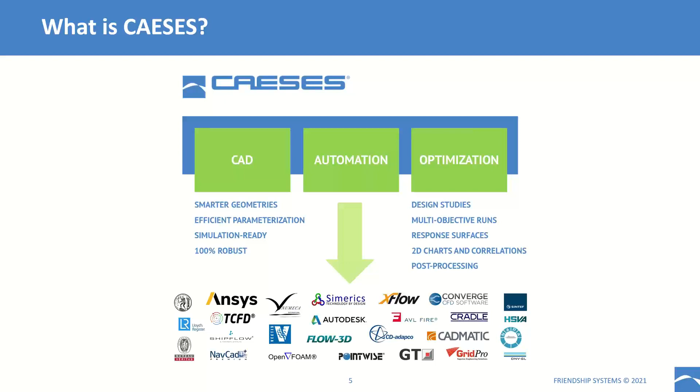So now let's take a look at our new release, CAESES 5. CAESES 5 can be regarded as the beginning of a new generation in terms of the development of CAESES, and it brings along news in terms of technology, what's under the hood of CAESES, but also what is on the outside, meaning the user experience, the things you will readily see when you work with CAESES and open it.

In terms of the things happening under the hood, but also some directly visible things, this release is a new platform into which many years of development went, and upon which future versions of CAESES will build, creating the necessary foundation for many future developments already on our roadmap or that will come onto it. So come along and let's take a look at what's new.

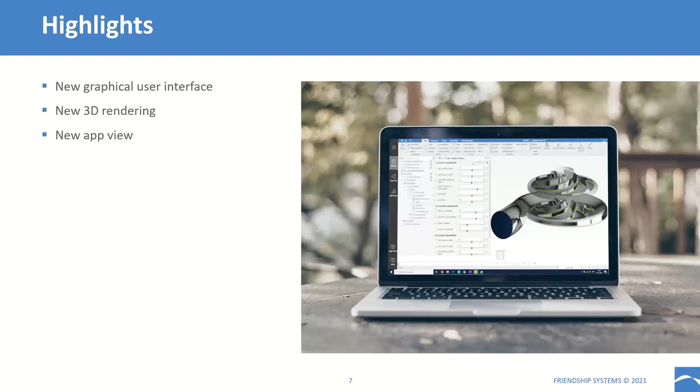The highlights are a new graphical user interface, new 3D rendering of the geometry in the graphics window, a new so-called app view, which we'll learn more about later, some smaller changes that make modeling easier and allow cleaner project structures, a new multi-threaded core inside CAESES, and a new design space dimensionality reduction method, which might need more explanation later. There are new morphing methods for imported geometries, improved documentation to make starting with CAESES and looking things up easier, easier access to support to get in contact with us, and easier license administration.

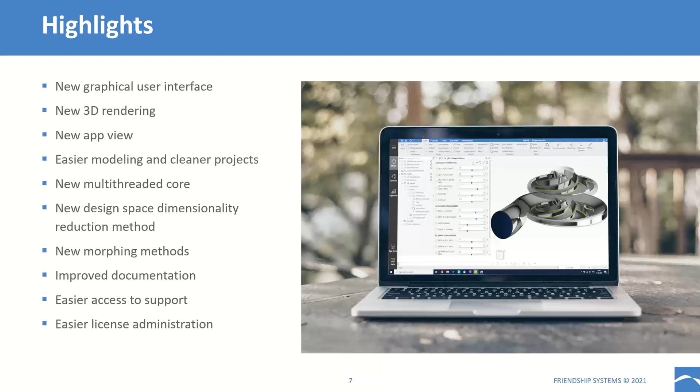So let's start with the first topic, the graphical user interface. This is definitely the first thing you will see when you open the new release. The new user interface is more organized, easier to use, and has a more modern look, which is nice to look at, but I think the two points at the beginning are very important, as they will ease the process for existing CAESES users, but also new CAESES users.

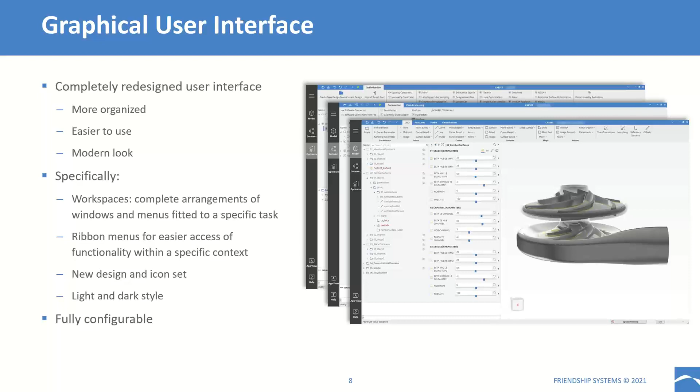This new user interface introduces the concept of workspaces, meaning complete arrangements of windows and menus dedicated to specific tasks, so it's easier to find the functionality you need. It brings along ribbon menus, a familiar element, a new design and icon set, and a light and dark style to match all preferences. If you have preferences beyond what's readily available, it's also fully configurable, so everything can be adjusted based on your requirements.

What you also see in the user interface, in the graphics window, is the new rendering engine. We've introduced a new, more advanced rendering in CAESES 5, allowing a more realistic view of your geometry models with more realistic shadows and transparency. You can set visual material settings on your geometry, like how reflective or shiny it is, and place your model in 3D environments, which wasn't available before.

We can also set local and global settings for things like render accuracy or specific views like section view and isophotes. Performance has increased too, giving much higher rendering speeds, especially for large models and imported geometries with a lot of small patches. Everything is much faster and more fluid. This rendering engine is also a necessary foundation for new developments regarding interactive working in the 3D view, which we'll see later in the new morphing capabilities in CAESES 5.

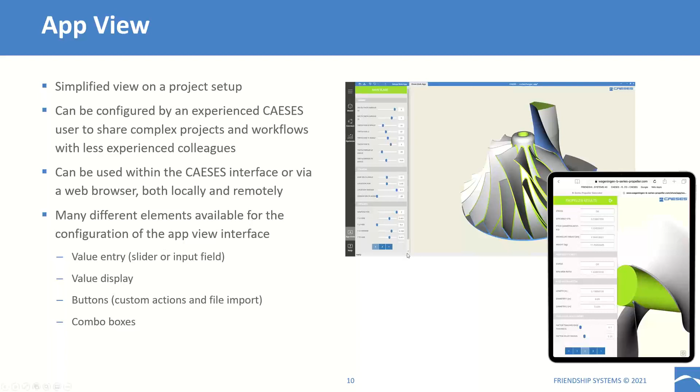The last topic at the surface of CAESES is some improvements for easier modeling and cleaner projects. We've introduced so-called dynamic object types, where you can simply create a curve without directly specifying which type of curve you want, or a point or a surface, and then choose the creation method after generating the object, based on a certain task you want to do with it. You can also change this creation method later in your project without breaking the dependencies.

Another improvement is post-processing operations at the object level, so you can directly modify objects without the need for image or transformation objects. This is something existing CAESES users might be familiar with. This speeds up the workflow, and because you have fewer additional objects, it keeps the project structure slim and clean.

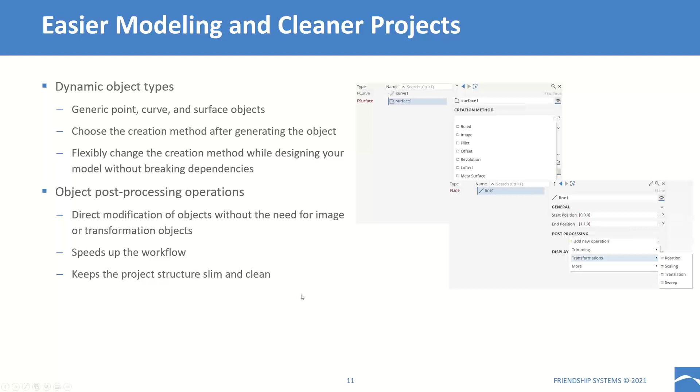And finally, improved object tree search, where you can search for objects and filter your object tree so that it makes it easier to find specific things, or have certain views on your object tree with only certain types of objects that you want to see.

Again, this is what the first things you will see on the surface, a short overview, and now I will give over to my colleague Carsten, who will give you a live demo and show these things in real life in CAESES.

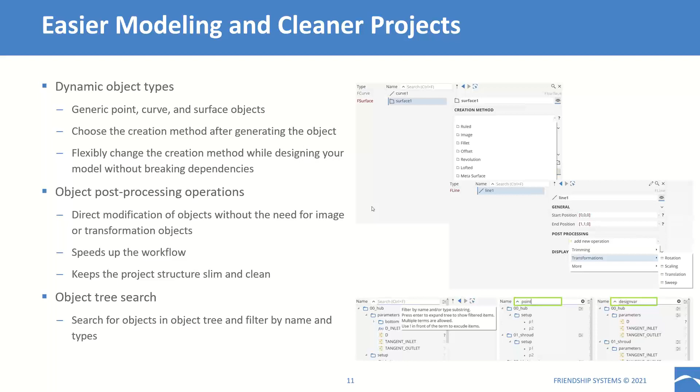In today's presentation, I not only want to show you all the details of the new interface, but I also want to tell you a little bit the story behind the scenes of how we did that and why we actually did that. Because our goal was not to just come up with a new polished, modern design or something like that, but we really wanted to improve the workflow for advanced users, but also for new users.

As you know, CAESES has a lot of different object types for points and curves and surfaces, which really makes the parametric shape design smart and powerful. But there was always the challenge to organize all these objects in an efficient way. So we thought about new ways of distributing all these objects to the user.

And we finally came up with, let's say, the ribbon graphical element, which you can see here at the top. I think most of you know that, and it's quite controversially discussed by different users with different software, but we really felt that this is a really good way inside CAESES to organize all these things. So you can see we have now here a ribbon where you can find points, curves, surfaces, and so on, grouped by point-based groups for points, for curves, and surfaces. So it's quite easy now.

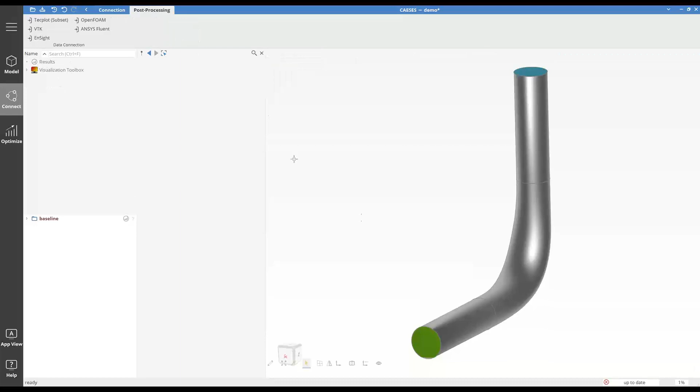Let's have a look at the workspace connect. So we have, for instance, here the connection tab, where we have the software connector included. And then we have a post-processing tab, where we can have a look at the results of our object. You can see this is some post-processing result of that duct I showed you. You can have access here to all kinds of different things.

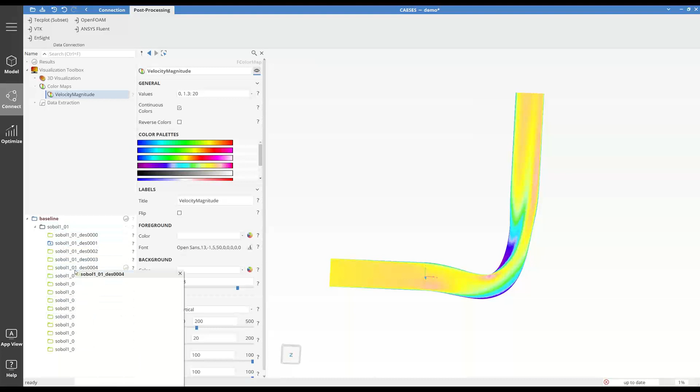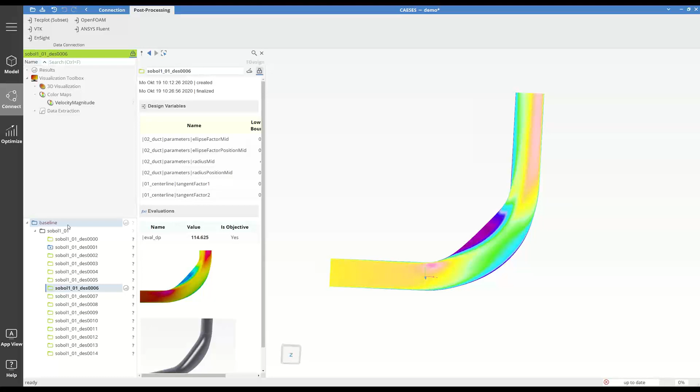Maybe you want to have a funky color map here. And you can also see you can switch to different designs which you might have created already. So maybe I can jump into one of these designs, and we can see how the post-processing results update. We can see now, highlighted in green, that we are in design 006. Okay, just a detail. Let's go back to the baseline.

Right, let's have a look at the optimization workspace. In the optimization workspace, we just have one tab, optimization. The ribbon has groups with general constraints, and then some design engines for design space explorations, like Sobol, Latin hypercube sampling, and so on.

In the tree, you see the design engines and the different designs. On the right-hand side, if you have run a study, you can see the designs, look at the design viewer, compare different designs, look at the 3D view, and we also still have the old functionality of the charts to compare design variables and parameters.

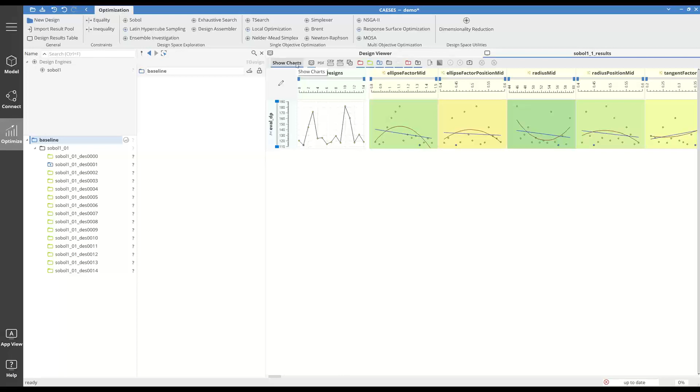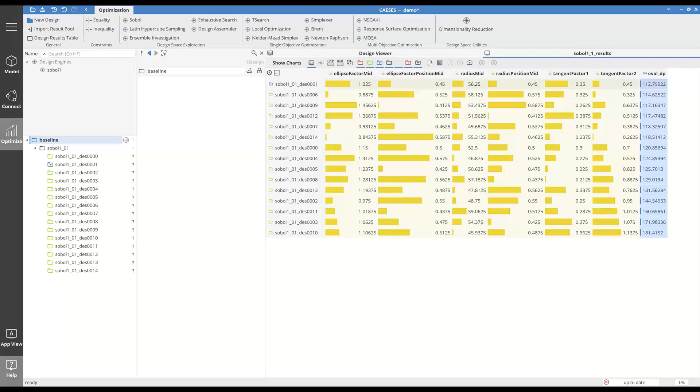All right, let's have a look at some other workspaces. You can find here the app view—I'll go to this a little bit later—but now you can also see the help workspace, where we can find the documentation, tutorials, and samples. So it's a good way, if you have any questions, to look first here.

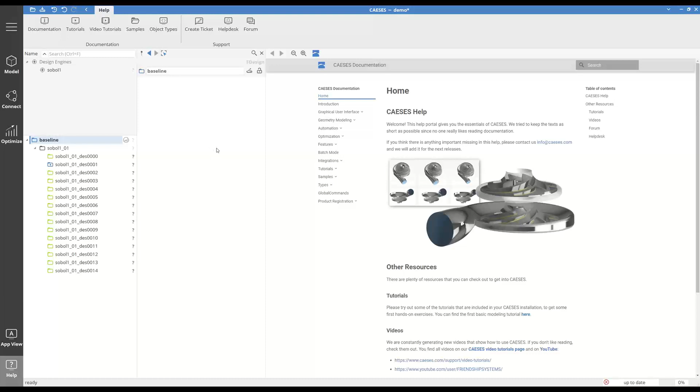But this is basically the graphical user interface. Let me show you a little bit more exciting features, which make the modeling easier and the projects better organized. Let me switch off the filter here and hide that. So we came up with so-called dynamic types for points, curves, surfaces, and you can find them at the top of each category.

Let's say we have a dynamic curve, and by default it's an empty curve, and you have to set a creation method. For instance, you can create it with a line. Then you can switch the line to maybe an F-spline, where you can change the tangency of that line.

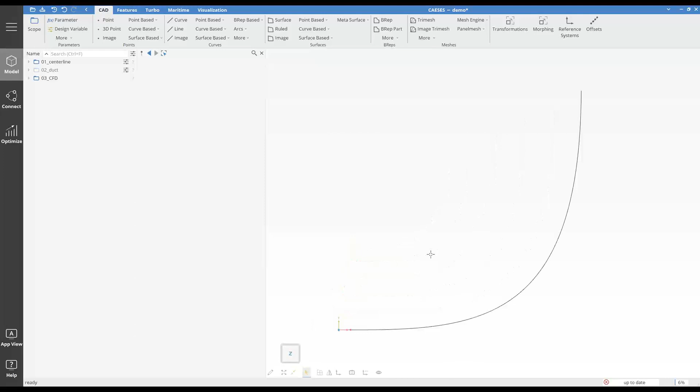All right, let's have a look at the real model, because that's quite nice when you have a complex parametric model. Let's say you have this duct shape here, based on that center line, parameterized with an angle, a tangent factor, and so on. At a certain point in your design, you realize maybe this isn't the perfect definition of that curve, so you want a different one.

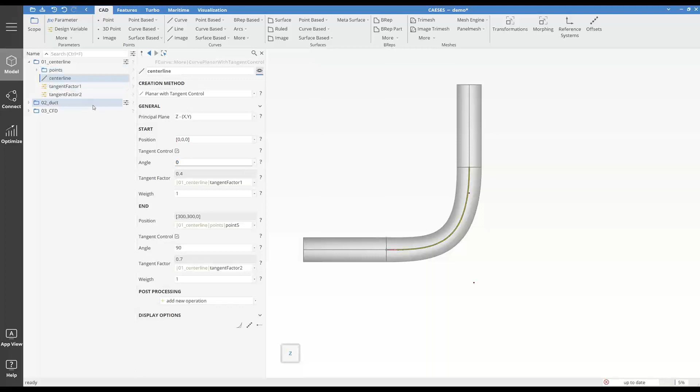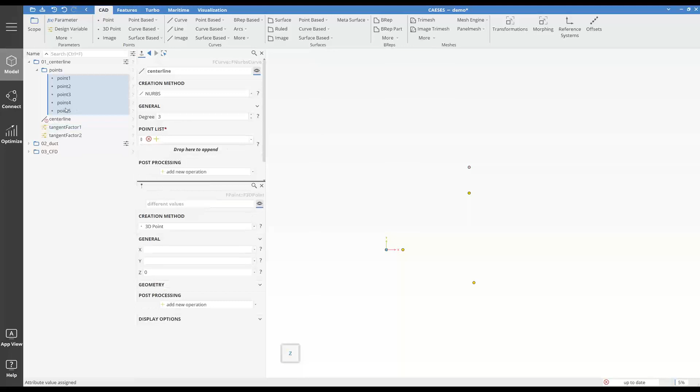As an example, I already created a few points, and you might want to change from that planar curve with tangent control to a NURBS curve. So that's quite simple—just go here and change to NURBS curve, then drag and drop all these points into the list. You can see the whole model updated. You now have complete control of that new curve, really flexible, and all the dependencies which belong to the center line are kept. It's quite nice.

Let me go back in history just to remove that step. So you can see I just have the planar curve with tangent control again.

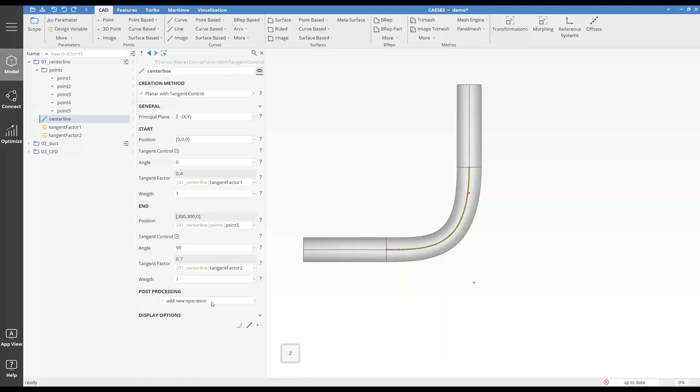Another exciting feature we have is post-processing operations directly on the curve object, surface, and so on. For instance, if you want to trim the curve by a certain angle, you can go to trimming, then trim by tangent angle. You can set it to maybe 45 degrees, then activate this post-processing operation, and you can see it's now trimmed at 45 degrees.

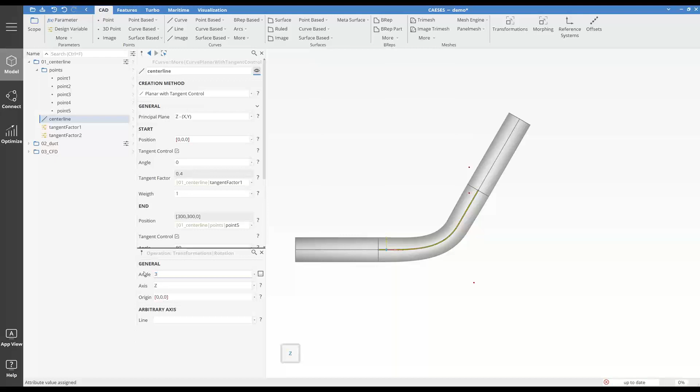Maybe you want to trim it at 60 degrees instead. Then you decide you want to extend that curve, so let's extend it by 50%, activate it, and here we go—we extended it. Maybe at the end you want to rotate all this stuff, around the z-axis, by 30 degrees. So you can see it's now rotated by 30 degrees. Really nice kind of operation chain here in the post-processing operations.

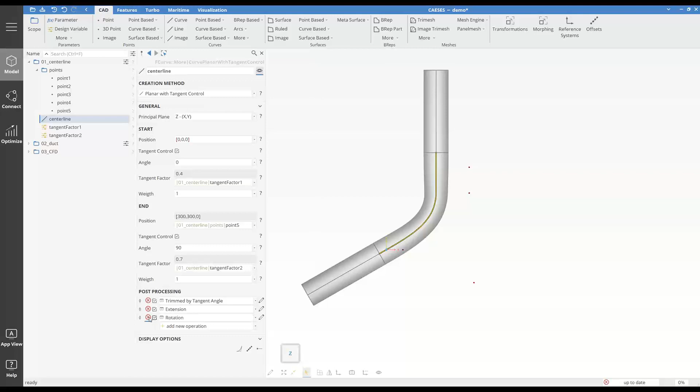And we didn't create any extra objects, so that keeps your project really organized. All right, so let's just remove that.

All right, another exciting feature is the rendering in CAESES 5. Right now you can see it in the 3D view, and we can change the rendering settings by clicking here on that icon. You can choose a different environment—let's have a look at the multi-area light environment, and we can show the environment with that button. When we twist it, that's basically the environment which reflects on the geometry.

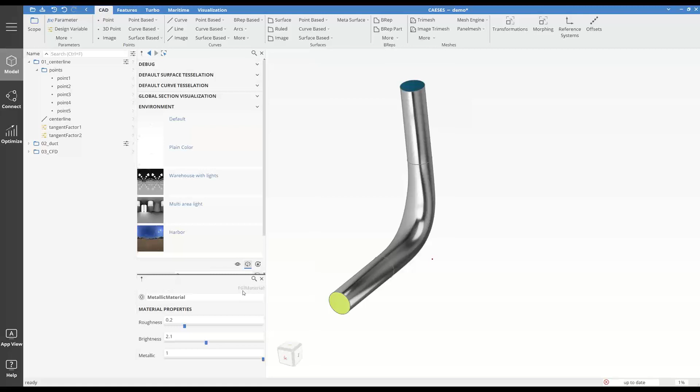Let me switch that off, and then you can choose the material properties of that object. You can put the roughness to 0, and you can see it's a really shiny metallic look, or increase the roughness to have a more realistic look.

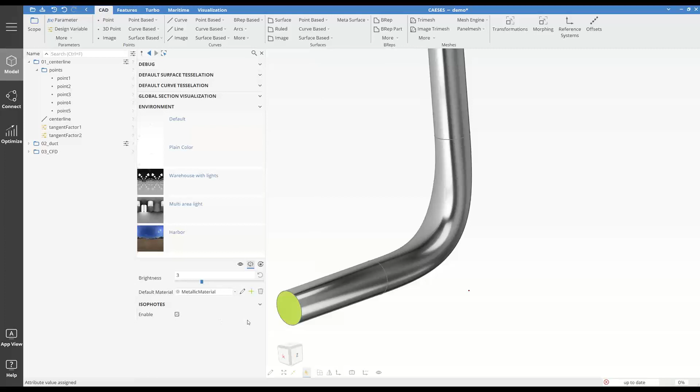And another nice feature is to visualize the isophotes of the design to see if there is good tangency between different patches.

The last thing I want to show you is the web application, or the app view, which is called inside CAESES. It's quite easy in that version now to set it up. So we can go to the design variable overview, and you can find that button here on the right, which will create the web app page for that overview, basically for all these design variables. So let's click on that.

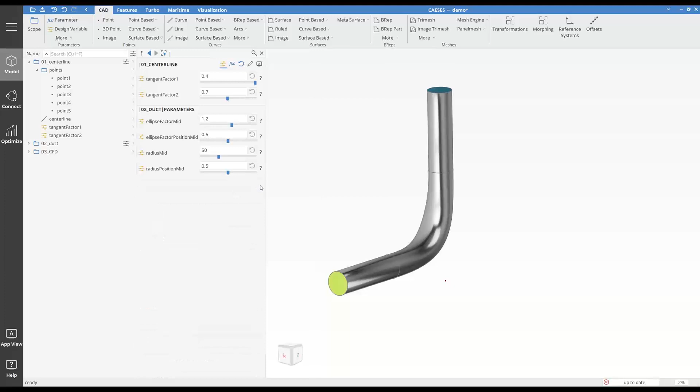We create the page. Then we go to the app view. We find the page which we created, and we see the web apps. We can create different web apps with different pages. So let's publish that one. And here we go, we have the web app, the app view, which we can change here.

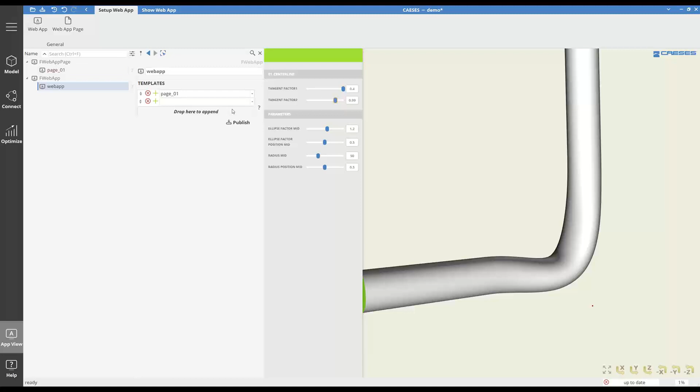Just as a small demonstration, maybe you can easily add another object here. Let's add a button, for example. Then we go here to add new operation, create a new standard button. Let's call that button export, and we want to export this geometry in step format.

Let's look for the object BREP. Therefore I use our object tree filtering, so it's quite easy to find the BREP object. I just write BREP, and then I put that BREP object here, and write the command export step. That will basically export that in step format.

So now we go back to the web app, click on publish. We can see the button here. We can go into the full web app view and click on export, and then it will export the piece in step format.

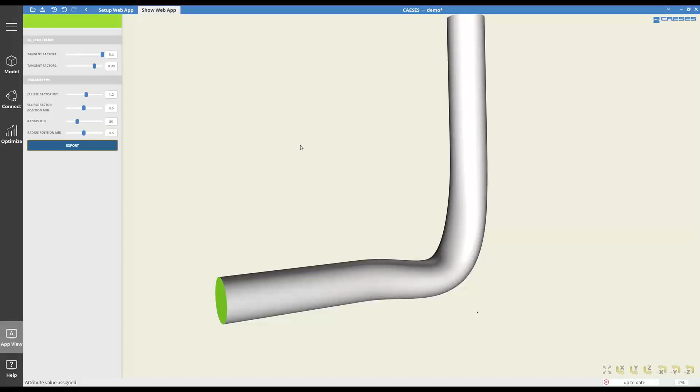Okay, that's all from my side. Great, thank you very much Carsten for this nice demonstration. So let me take over again and quickly talk about the next topics.

As I mentioned before, what Carsten showed now are the things at the surface of CAESES, but also something at the core of CAESES happened, which was actually the main driver of the development of CAESES 5 over the last several years: a complete re-implementation of the core of CAESES to a multi-threaded application.

So now everything is fully parallelized and supports multi-core processors. Before, CAESES only ran on one of your processor cores, which in an optimization process, the update times for the geometry variants are negligible compared to CFD runs. But if you're working on your model doing interactive work, sometimes it's annoying to wait for the model to update. And that has become much better now.

An additional point is that the update now happens asynchronously, which means the interface will not freeze or become unresponsive while updating. You can actually change a parameter value, and while the geometry is updating in the background, you can continue to work, change other parameter values, or do other things. So you don't need to wait every time if you have a very complex model that can take a long time, which is annoying if you want to do several steps one after the other.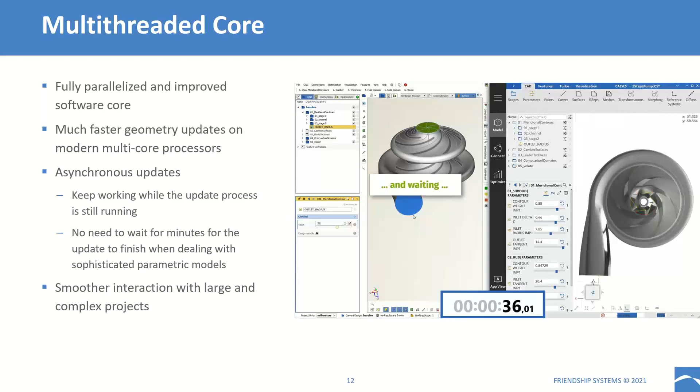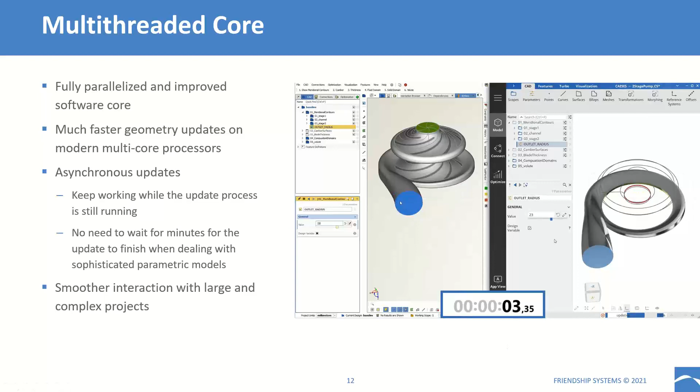While CAESES 4 is still working on that update, we're still waiting. In CAESES 5 here, we can continue to work, rotate the model, change views, select objects, things like that. Of course, not all updates in CAESES 4 were so long; this is a particularly complex model we picked out, and you can see after 57 seconds the update has finished. So I think it's a very good improvement, especially for heavy users of CAESES working on complex things.

And while we're talking about speed, another issue is speed of optimizations. Often our customers are working with parametric models that have a high number of free design variables, which would require many simulation runs to get an idea of the design space, which can be quite expensive if you have expensive individual runs.

So we introduced a new methodology here, which is called design space dimensionality reduction in CAESES 5, which is based on, some people might know this, principal component analysis. And the idea behind this is that we transform the parameterization of our current model to a completely new parameter space.

And when we're doing this, we remove correlations between the parameters at the same time. So what we mean by this is often in your parametric model, you have certain areas of the geometry that are influenced by several of the parameters, because the areas of influence overlap between the parameters. So you have some correlation between your parameters - this is normal, and this is what we're trying to reduce.

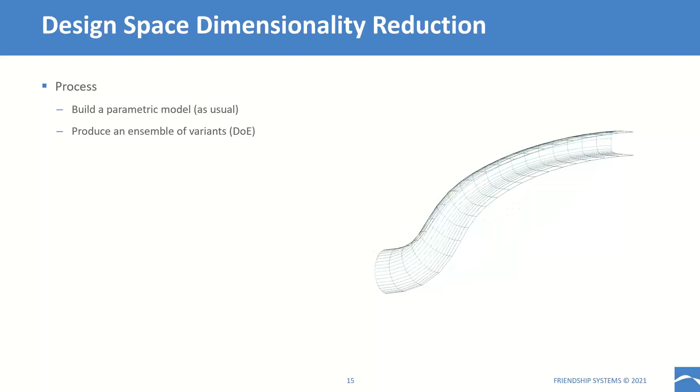You have a complex variation of the geometry and you break it down into so-called principal components. And here you can see for this duct the first four principal components. These are the modes of variation, extracted from this pool of variants. And now we can choose how many of these principal components we want to use. These are, so to say, the new parameters for the model in the new parameter space.

And then we can start optimizing with these new parameters. So the optimization algorithm, rather than changing the values of the original parameters, can change the values of these principal components. And once we have a combination of values, we can transform that back into the original CAD space, set the parameter values accordingly, create the geometry, analyze it, and give the feedback to the optimizer. And then the optimizer can create a new variant based on these principal components.

And you can see here that it's quite easy to reduce the number of parameters quite massively. For this duct example, if we use only the first principal component, we retain slightly more than 50% of the variability of the original model. And already if we add the second principal component, we cross 90% of the original variability. And the more we add, of course, the more we come closer, but we don't need many to have a variability that is really close to the original model. So we're not missing out a lot of the original design space, but we have a much smaller number of parameters.

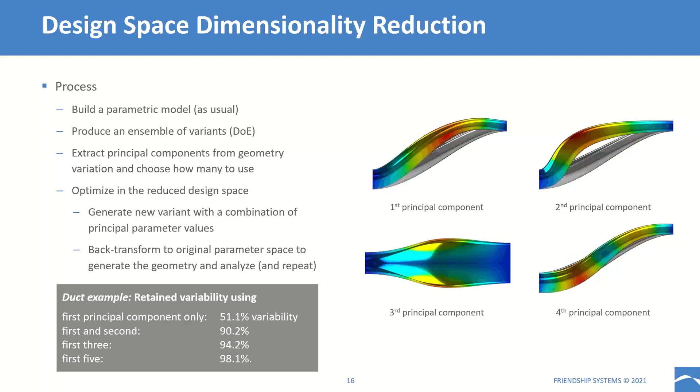And before we talk about morphing, I would like to invite my colleague Heidi to give you a small demonstration of this design space dimensionality reduction method.

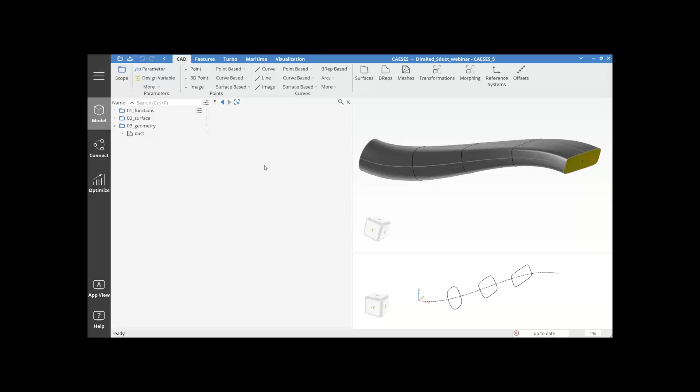Yes, thank you for the introduction, Mattia, and the first explanation of the dimensionality reduction. I would like to show you now here a little bit how the images Mattia just showed you and the dimensionality reduction was set up, to explain this a little bit more in detail.

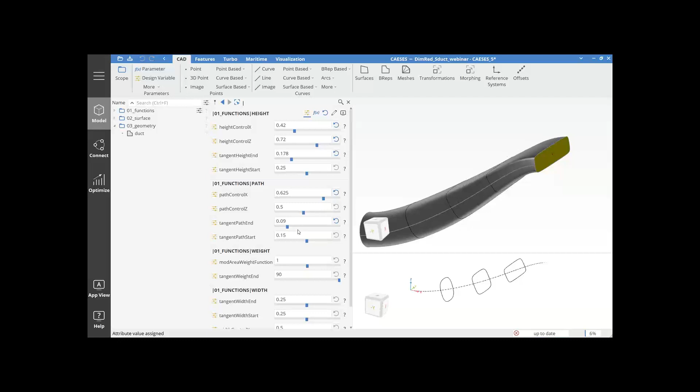So we have a duct example here that's quite a simple one with different cross sections as a meta surface defined here. You can see some cross sections going from a circular shape here at the inlet to a more rectangular shape at the outlet. And then we have set up in total 14 different design variables, as usual, as a parametric model that define the shape of our duct here, which is the one we would like to use for our example case here, but running an optimization with all those 14 would be quite cost intensive and resource intensive also.

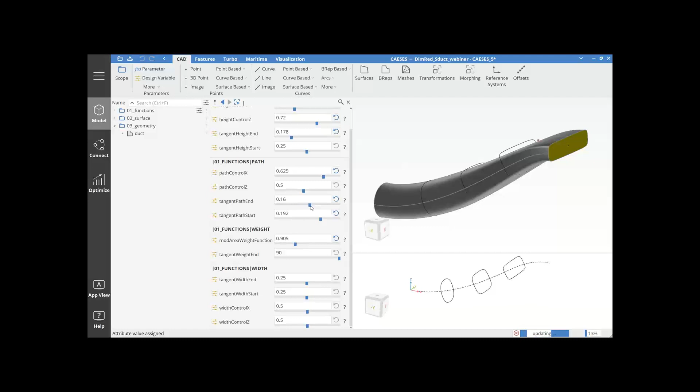So that's why we used this to try the dimensionality reduction and actually try to set up a meta model that could find the design variables or detect the ones that influence certain parts of the geometry, maybe in a similar way, and get rid of those correlations.

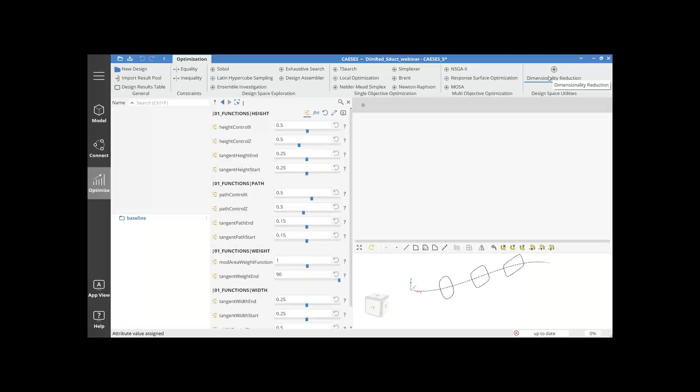So in order to use the dimensionality reduction method, it's actually located, as Mattia has shown before, here in the optimization workspace. It's not an optimization algorithm itself, but rather a supplementary tool that can be used before starting the optimization.

So if we create a dimensionality reduction model here, or want to create this meta model, we need to define a number of variants that we want to create in order to put together the geometry pool, where the original 14 design variables in this case are modified and where we want to detect the correlations. So let's just put 200 variants, and for this example, maybe go with 300 sample discretization points we want to put on our geometry.

Then we choose the geometry we want to look at. In this case, we pick the duct, the surface wall, and then we need to find the design variables that we would like to use here, that we would like to modify in order to derive the model.

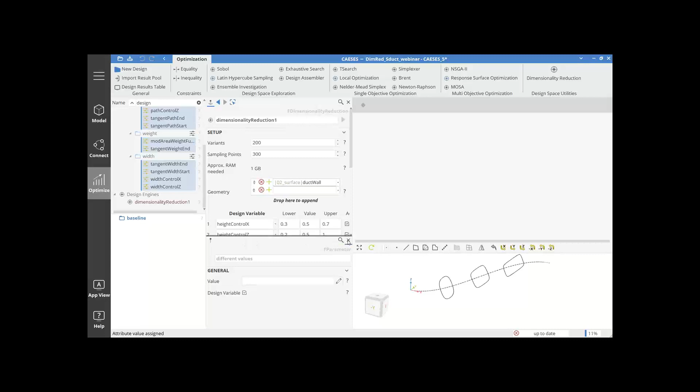So let's just pick the design variables here and put them into our dimensionality reduction object. We want to create the model with those 14 design variables. And then let it run so that the model can be created.

Let's do this. This usually only takes a couple of minutes, or in this case maybe just about a minute, to create those 200 sample models. You can see here that the path is varied, though we don't see the other functions that are also varied by all those design variables here in order to get the derived model.

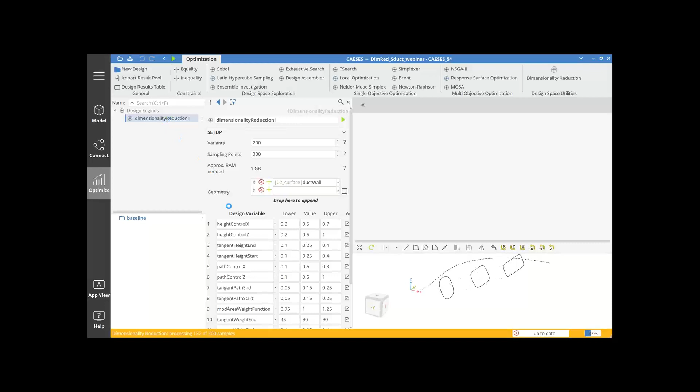So this is just the preparation to use the dimensionality reduction, which we will later put into maybe a design of experiments here, using a SOBOL that will be based on this dimensionality reduction and will use not those 14 design variables, but rather the new principal parameters that will be derived from here.

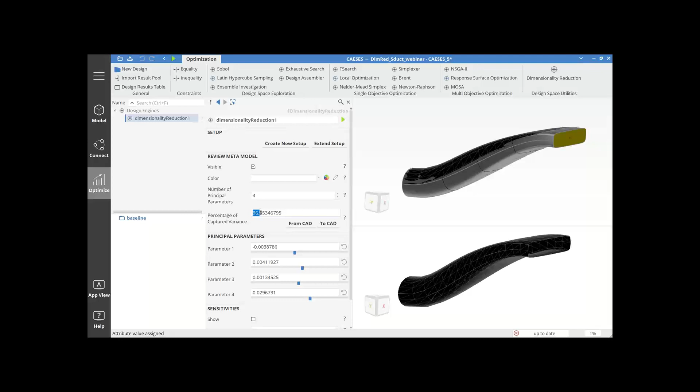So if we look at this, now we can see the black shape here. That's our so-called meta model, our new discretized shape with the 300 sample points we typed in earlier. And if we go here and set a number of principal parameters, let's say we want to use 4 in our optimization, we can see that this is quite good already. We have 96% of the original variance and variability captured here.

So if we want to look at the influence of each principal parameter that is happening, I can move those sliders here and see what kind of modification is done and applied to my dimensionality reduced shape here that will drive my optimization algorithm later on.

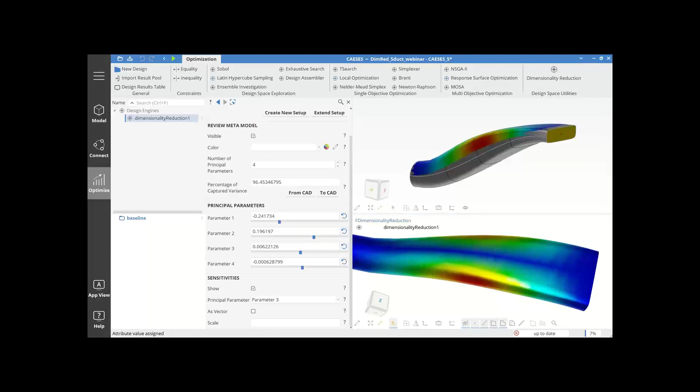If I want to get a more detailed look, or those sensitivity contour plots on my geometry, shown as a vector here, I can use the sensitivities down here to see on my geometry what region is most influenced by which principal parameter, what happens if I move the third principal parameter, for example, just to get an appreciation and an overview of what can be done and what is modified with these newly found principal parameters.

So the black shape is our meta model, our dimensionality reduced model, but what we're most interested in is that we find those original design variable values for the shape that will be defined by those principal parameters here.

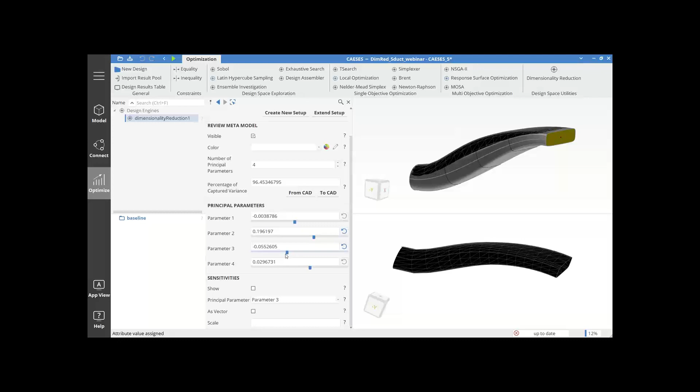So that's why usually, as Mattia mentioned already, the back transformation comes into place, which happens each time a new shape is defined with those principal parameters. Actually, each time the original design variable values need to be found so that my NURBS-based model, my original model, tries to match the shape defined by the principal parameters as closely as possible.

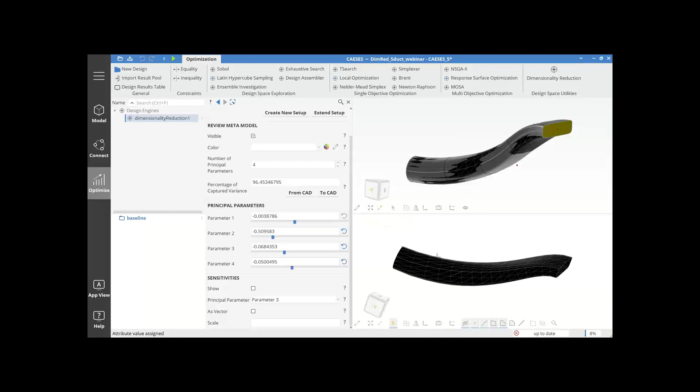So this step is what happens each time. I just triggered it manually, but if we put it into an optimization or exploration algorithm, this step is what happens at the end of each shape variant creation with the principal parameters. So if I want to use this now, maybe in a SOBOL, and run a design of experiments, I can choose my meta model, my dimensionality reduction model, and put it in.

I see I have chosen 4 principal parameters here with 96% of the variance retained, and I want to run a SOBOL base, so let's just run 10 variants here.

This is just from a pure geometrical view, so we don't have to run any CFD or anything else. We can add some evaluations to it, of course, which I won't do right now due to time. And also we can add some design variables, but those are the original ones, they're only being monitored in this case, so they appear in the design result table.

Because those are the ones that are dependent on the values decided for each variant from our principal parameters, let's just create 10 variants here and see what shapes are created.

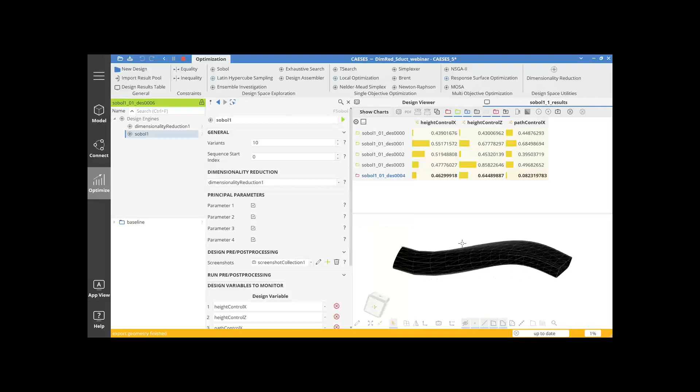So the actual shape is defined by those principal parameters, and then a back transformation happens to find the NURBS-based original BREP model, which we can see in the screenshots I'll show you in a second.

Okay, so this has finished. Let's see here. We can actually see that those variants have been created and the back transformation has happened. Running more sample variants in the beginning when setting up the meta model helps increase the accuracy of the back transformation. But this is usually a nice way to explore a design space by only using 4 principal parameters in this case, instead of using the 14 original ones.

This can actually help save optimization time and be really beneficial in the first phase, especially when you want to find a subspace, or a tendency in the design space, where good results are very likely to be found. So as Mattia mentioned, we would like to encourage you to test this yourself and give us some feedback to help us improve this a little bit more. Thank you.

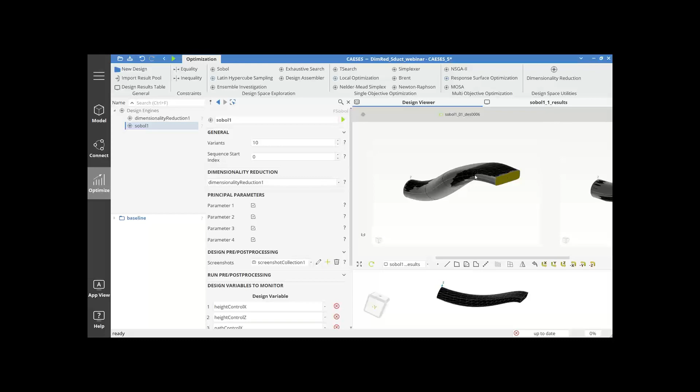Great, thank you very much, Heidi. Really great method, as I mentioned, for complex models with many parameters to do a quick optimization or a quick scan of the design space with a much lower number of parameters. This is actually the topic that Heidi did her master's thesis on, as I mentioned before.

So really interesting. The next topic and new functionality in CAESES 5 that I would like to introduce is morphing. As you might be familiar with, we always had some kind of so-called morphing methods in CAESES, or what we also used to call partially parametric modeling.

So many of our customers are actually working with so-called fully parametric models, which means you create a geometry model from scratch within CAESES and define all your parameters as you go along. But quite often you also have a case where you have an existing geometry that comes from another CAD system, and you would just like to do a quick optimization on it and make some modifications to this imported geometry. That's where partially parametric modeling, or morphing, comes into effect.

As I said, we had some methods for doing this before, but we wanted to increase the capabilities of CAESES for this approach, because we can see there is quite a certain group of customers that can work very efficiently with this approach. That's why we introduced new morphing methods now in CAESES 5, which are based on radial basis functions.

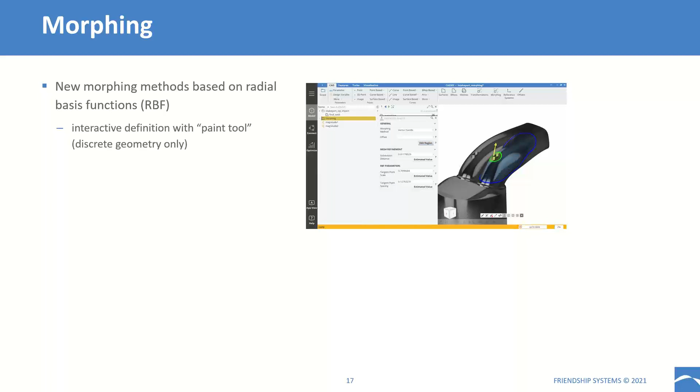The first of these is an interactive morphing where you define your deformations to the geometry interactively with a paint tool, decide in which area you want to modify, and push and pull your geometry, as you can see in the animation. This currently only works on discrete geometry, which means something like an imported STL file or a surface mesh.

And then we have also another method where the deformation is based on a source and target geometry. Like you see in the animation below, we have a source curve in this case, which is the feature line at the end of the roof of this vehicle, and then we have created a new curve, the green one, which is the target. This is used to compute the morphing deformation to go from the original source geometry to the target geometry, and you can also interpolate between these two or extrapolate in both directions to create new shapes.

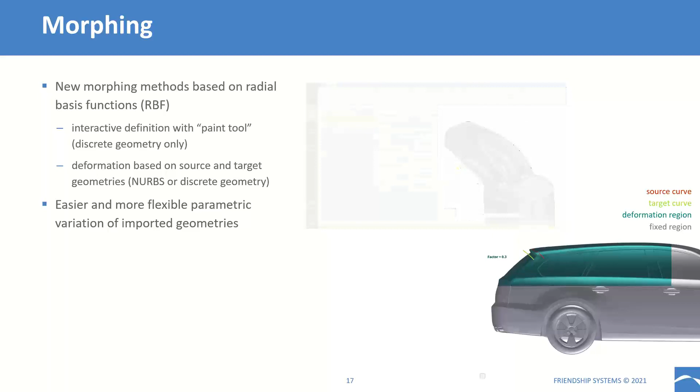And this really gives an easier and much more flexible approach to parametric variation of imported geometries than what we had before in CAESES. Of course, the other methods are still available in CAESES, but these new ones really add a lot of flexibility and speed in defining these parametric variations. And now I would like to invite Heinrich to give us a small live demonstration of this functionality.

Thanks, Mattia. I think there's a common misconception about whether partial or fully parametric modeling is actually the way to go forward. People often feel like they are at a crossroads where they have to choose whether they want a fully parametric model that offers all the freedom and complexity of the design space, or rather a partial parametric model where they modify some imported geometry derived from a different model they already have.

And the truth is, in most cases, these two are actually used best in conjunction. It's not like there are two different roads to go down, but rather two different directions. You can think of it as two vectors that span a plane, and to reach any point in that plane, except for the axes themselves, you need to combine both techniques together.

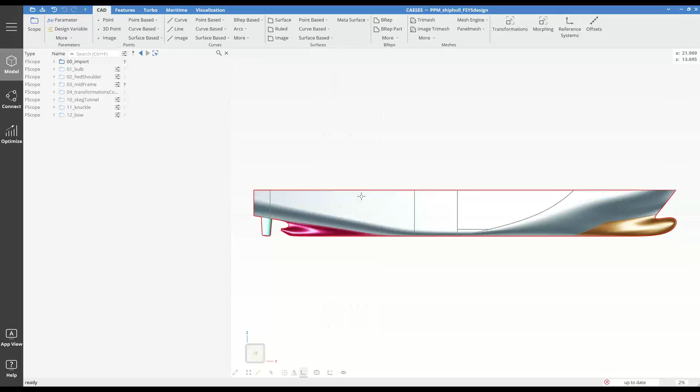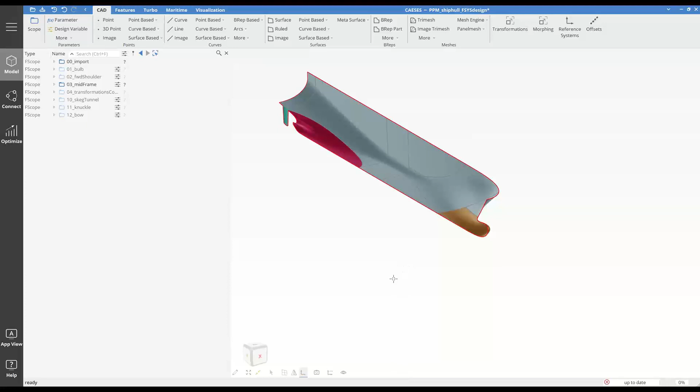So I've brought along an example of a ship hull. This is in fact an export from a fully parametric model, re-imported into this project file. Just to underline what I was stating, I've put together a couple of transformations. I've shown a similar example in a webinar we did a week ago in the framework of Holy Ship together with Kongsberg. I just want to go through the modifications we've put into place here.

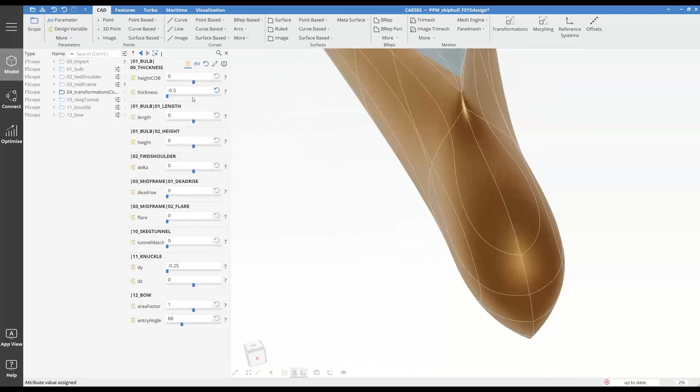Let's start by looking at the bulbous bow, where we can change through a freeform deformation the thickness of this bulb here. Like so. We can make it way narrower or a lot wider if we wanted to. Looking directly from the front, we can shift volume up, and we can also bring it down, or we can change the length of the bulbous bow.

In this case, a delta shift is used to modify the shape. We can move it up and down. In this case, it's a delta product to ensure that the deck stays horizontal while we move the bulb itself up and down here.

And then what's also put in place is a slight variation of the forward shoulder, because usually if you do this kind of modification, you're looking at the wave resistance of a ship. So if you change the bulb, you maybe want to modify the forward shoulder as well to find a favorable interference of the waves you generate, to reduce resistance. I can make this fuller or more slender with a surface delta shift in this case.

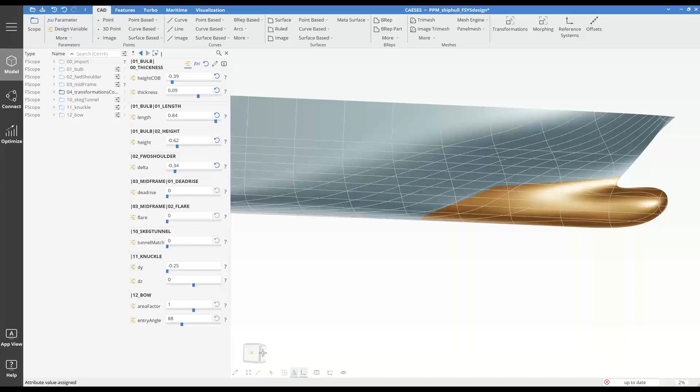And then I can do even larger modifications, like changing the dead rise angle, moving up the flat of bottom here to an angle, or tilting in the sides by introducing a flare angle.

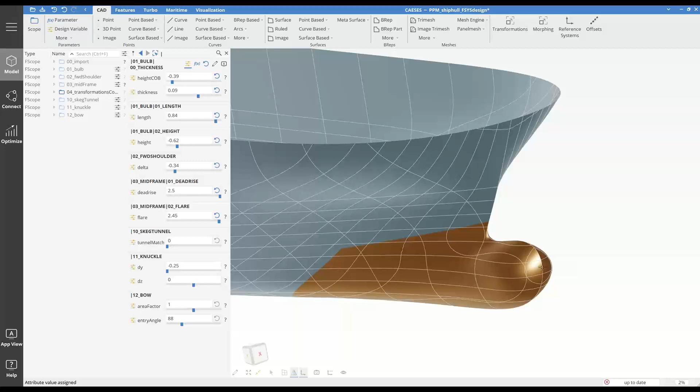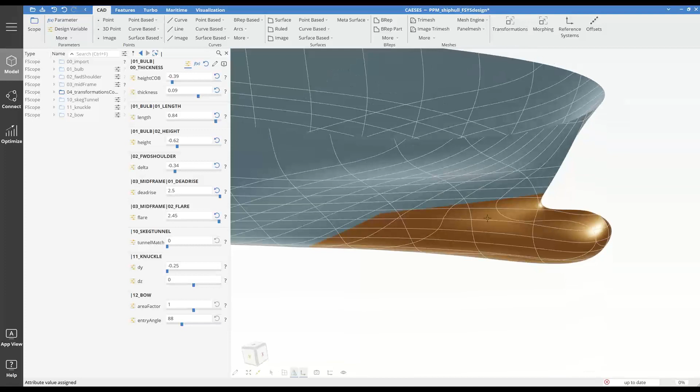What all of these traditional methods of partial parametric modeling have in common is that they are not distinct. In many cases, you can specify what you want to do — let's say the thickness of the bulb, we can make it wider or narrower — but we cannot define a distinct outline. And that is sometimes what you want to do. Maybe you want to set a certain waterline shape to your model, or a certain contour to the bulbous bow, because you have constraints or empirical data on the waterline entrance angle that you want to make use of.

These kinds of things were in the past often reserved for fully parametric modeling, where you could use meta surfaces and ensure that certain shapes and sections would be matched. But now with BRep morphing, what we can actually do is do just this on existing imported geometry.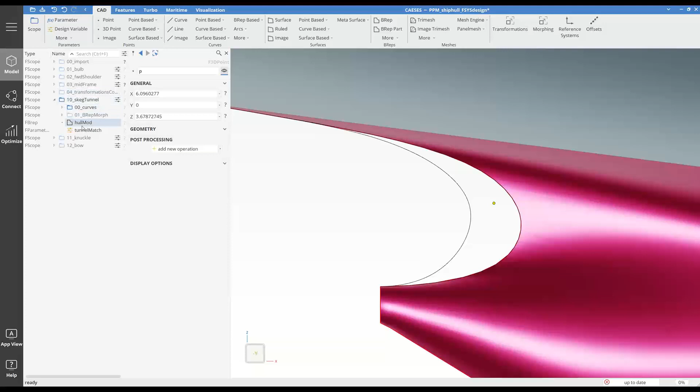So if we look at this here, what I've done is created this little curve, which keeps the tangent and curvature of the original stern valley, controlled by this point. I can move this point around in space freely and change the shape. Then I can use B-rep morphing to conform my existing geometry and make it match exactly that new shape. If I turn this on here, you can see that we perfectly match the new given tunnel geometry.

And what I can also do is interpolate somewhere in between. So instead of just turning this on and off, I can go to somewhere like 0.5 and have a new geometry that is right in the middle of the two existing variants. I can even extrapolate to maybe 150% here, and I could also go down to negative values, in fact, if I wanted to. Like so.

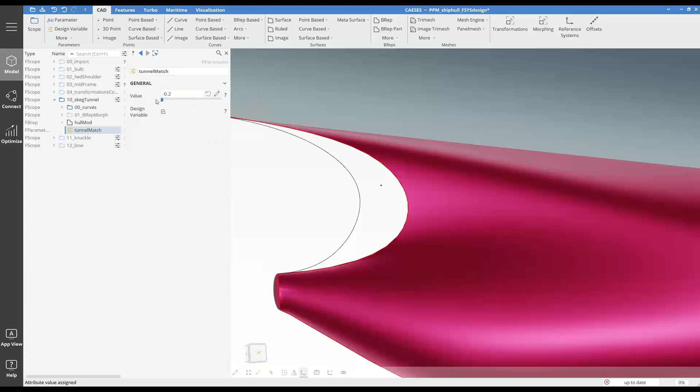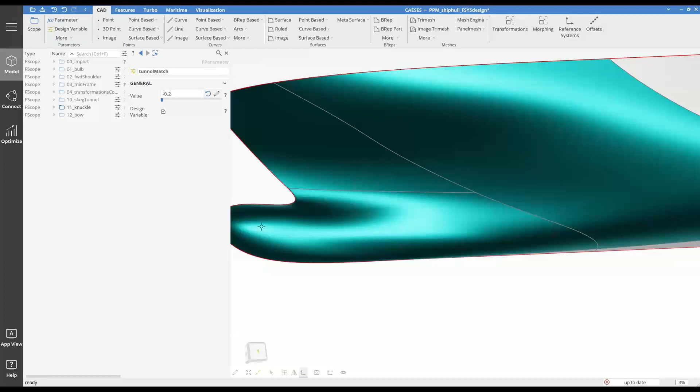I've created another example at the knuckle line of this ship. This is quite a common topology. For some ships, you would see a sharp knuckle here. For this one, it's smooth, but still similar to what I explained earlier about the interference of the bulb variation and the forward shoulder. This is a very interesting area when you're looking at not just resistance, but maybe even hydrostatics. And in resistance, it's also maybe not just wave making, but frictional resistance, because you have a lot of area to tweak here.

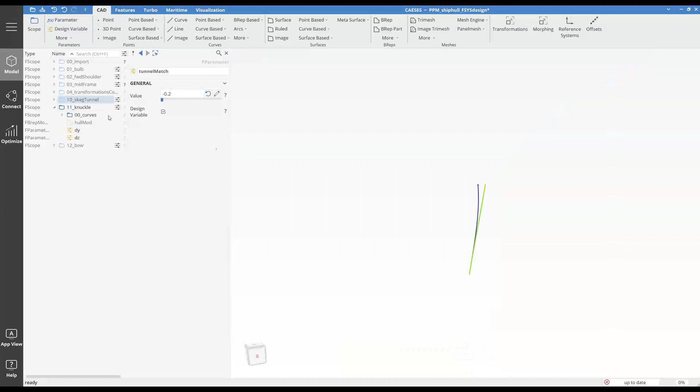So what I did is I created myself two curves. Let me turn this off real quick. One is the green one, it's just a copy of the current shape. So I've taken from our last modification this knuckle line, created myself a copy, and then I've created a copy of that copy, which I am able to put some modifications to. So the blue one is my modified geometry, and I can control this with the design variable dy here, which allows me to shift that endpoint left and right. And I have another one, dz, which allows me to bring it up and down.

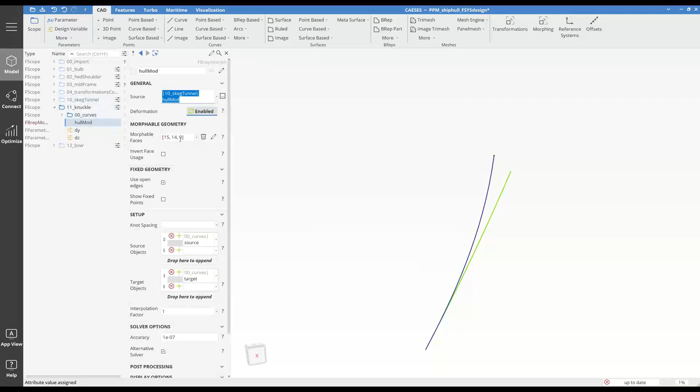And then if we look at this object here, that's the BRep morph object itself. It doesn't need a lot. It takes in the latest geometry variant, which in this case comes from this folder number 10. It needs a number of morphable faces. So if we look at this again, the 15, 14, and 9, that's actually this patch of the BRep. So these are the ones I want to modify.

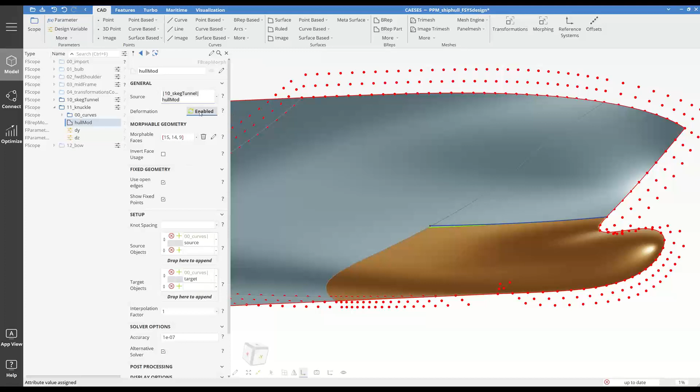We can also take a look at the fixed points. Over here, you can see that I have 3 rows of control points so that I can fix the contour in space and tangent and curvature continuity. And then I can specify my source and target, and these could be points, curves, surfaces, whatever it is. As soon as I enable that, you can see that my BRep immediately conforms to the blue curve that I've freely chosen. And it perfectly matches it, and it keeps the continuity towards the rest of the shape.

And then, like Mattia mentioned, we have taken this one step further just to open it up for a broader range of applications, and also implemented the same functionality for tessellated geometry. So say you have an STL file that you have imported, and then let's pretend that there is some sort of deck given here. Maybe we need to fit a certain number of car lanes or a ramp for boarding and unboarding of the vessel here. So what I've done is I've taken a tri-mesh as a copy of my hull.

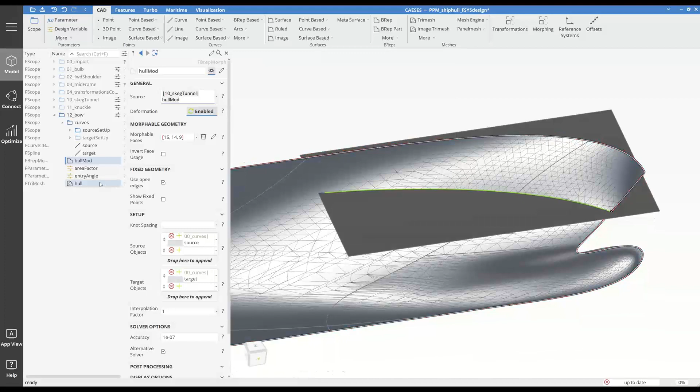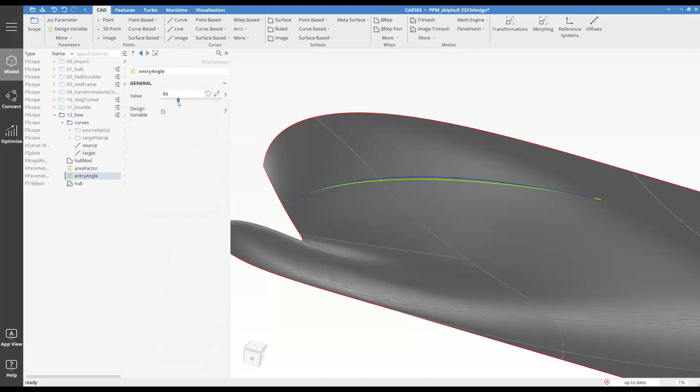I've intersected it with this deck surface here to get my source curve again. So this is the initial source curve. And then I've created again a new variable curve, which is called target over here. And I can control this target curve, for example, with the entry angle over here. So I can make it fuller. Also this area factor, which can make it narrower and wider while keeping the given tangents.

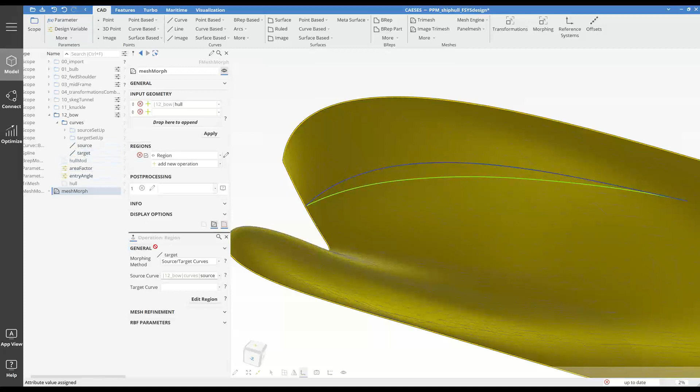And then all I need to do is create myself a mesh morphing object that takes in this tri-mesh hull as an input. So I click on apply here, and I can hide my existing hull. And then I need to add a new region into which I want to apply my deformation. This vector handle method is what Mattia has just shown in his presentation. There's also generic transformations available. And like I said, I'm going to use these source and target curves here. So just put them there and select to edit my region.

And I can very conveniently here paint the region that I want to actually apply my modification to, just like so. And as soon as I finish editing, you can see the geometry conforms to my newly given blue curve. And if I were now to change the entrance angle, for example, here, you can see that it follows along. And that's it from my side. And I would hand the presentation back to Mattia for our final Q&A session.

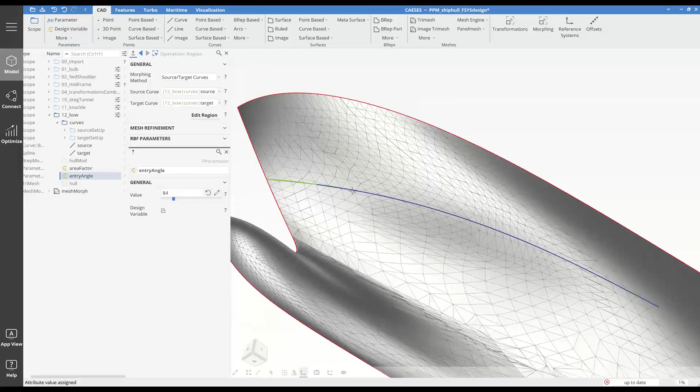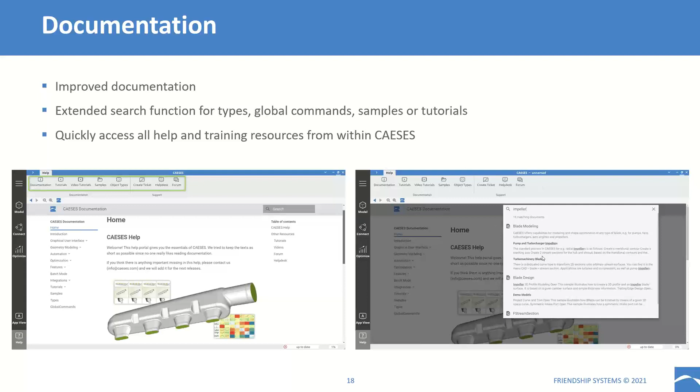The documentation has been improved in CAESES 5. Carsten already showed you the documentation workspace and help workspace with the documentation page where you can find access to all the different resources. One other thing to point out is that we have improved quite a lot the search function. So now if you're looking for certain keywords and you want to find articles, material, information about that, it works much better. It's much easier to find.

And if you don't find what you need in documentation, or you have something to report to us, you can use our help desk. We introduced a new help desk a little while back, and now this help desk can be accessed directly within the user interface of CAESES.

What's especially interesting is that you can create a help desk ticket directly from the user interface. If you encounter a problem or have a question, you can create a ticket from this button, and directly include a screenshot of the current CAESES user interface. You can also attach the project file you currently have open, which makes it really easy to create a ticket. You don't have to go to your browser, open the help desk, create a new ticket, and so on - it's much faster.